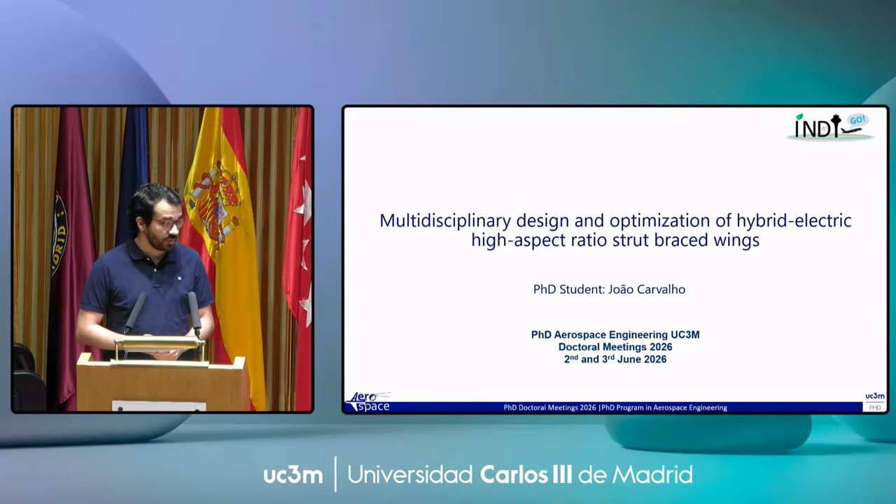Good morning, everyone. My name is João Carvalho, and the title of my presentation today is Multidisciplinary Design and Optimization of Hybrid Electric High Aspect Ratio Strut Braced Wings.

So the motivation of my work is supported by the aircraft climate impact, with the objectives of Europe to achieve carbon neutrality and also to reduce greenhouse emissions. So with these objectives, and taking into account that most civil aircraft still have a traditional configuration, meaning cantilever wing, there is the need to expand the design space if we want to meet increasingly stricter requirements, not only in terms of performance and efficiency, but also in terms of noise emissions and the overall air quality.

So this is an opportunity here, and in this project, Indigo, which I've been working on, and also in my thesis, we chose this non-conventional design, the strut braced wing, which consists of a cantilever wing with an extra wing, which we call strut, that basically supports the main one. From a structural point of view it allows to minimize the bending moment of the main wing near the root, so having wings with higher aspect ratios and therefore maximizing the aerodynamic efficiency. So this is the idea.

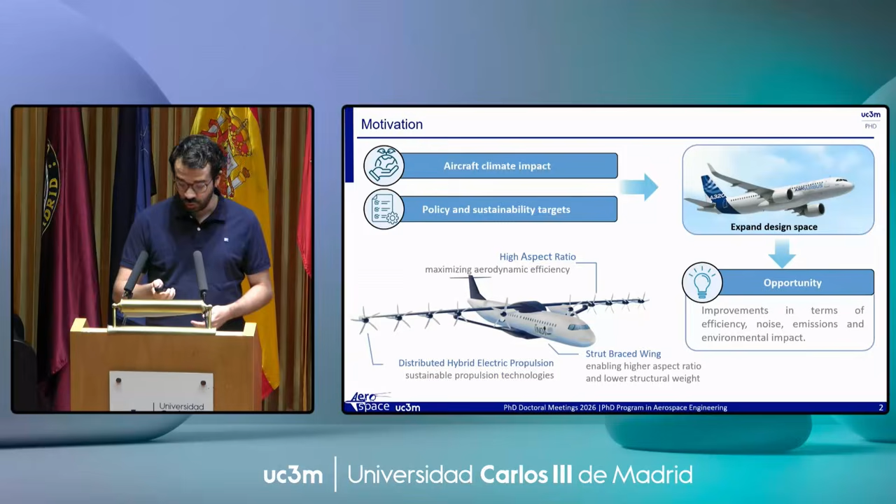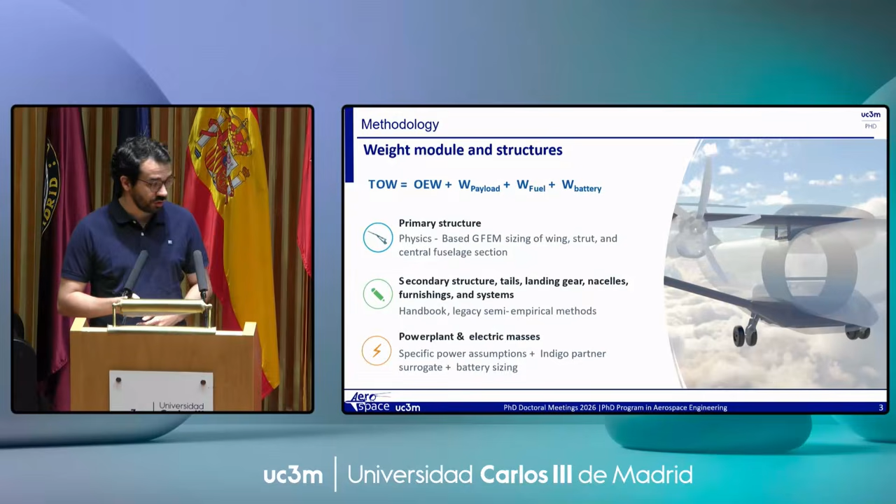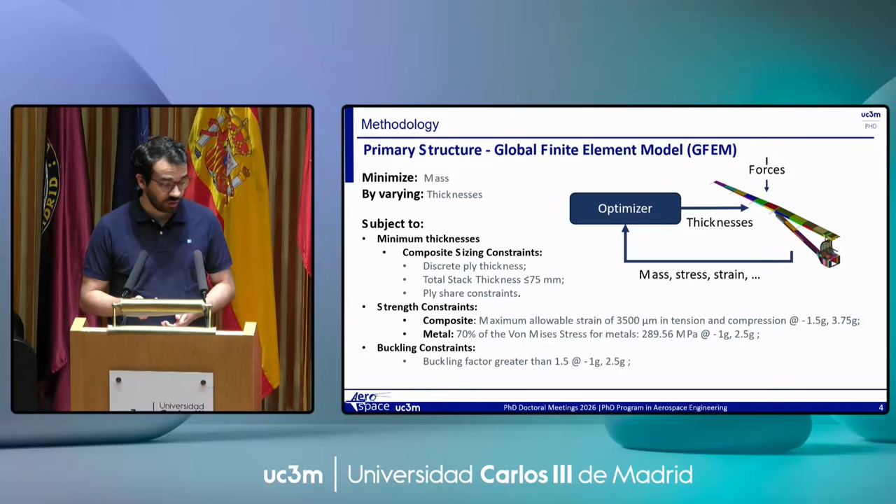So the physics-based model is basically a global finite element model, the GFEM, that is generated automatically within the OptiStruct framework, and it is a simple sizing optimization in which the wing and strut are divided in several panels, and then each panel thickness is optimized. We also considered composite materials with predefined stacking sequences, and the traditional load cases, which I will not explore in detail due to time constraints, and the traditional strength and buckling constraints.

The other most important module of this configuration is that it is hybrid electric. So we have a parallel serial configuration which we divide into two main parts, the inboard and outboard. In the inboard, we have the gas turbine connected directly to an electric machine that can function as a generator or a motor. If it's a generator, it extracts the mechanical power from the propeller to feed the electrical grid, and if it works as a motor, it goes the other way around, so it extracts the electrical power from the outboard part to feed the inboard propeller.

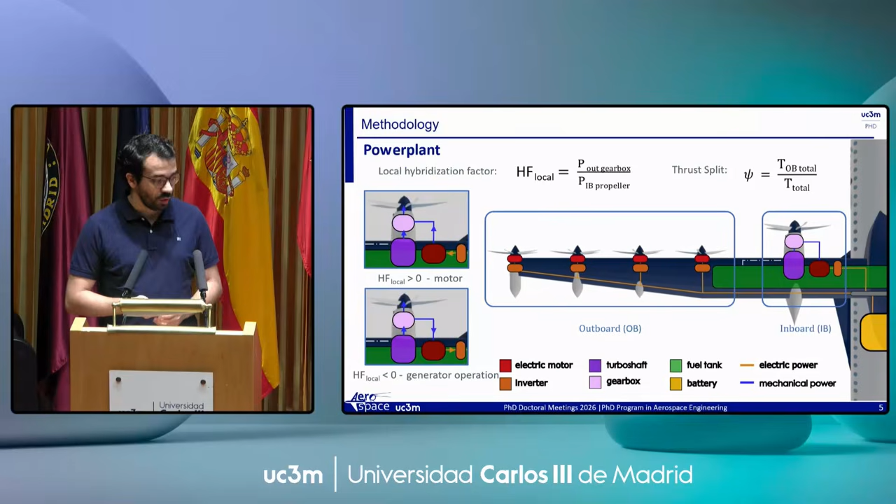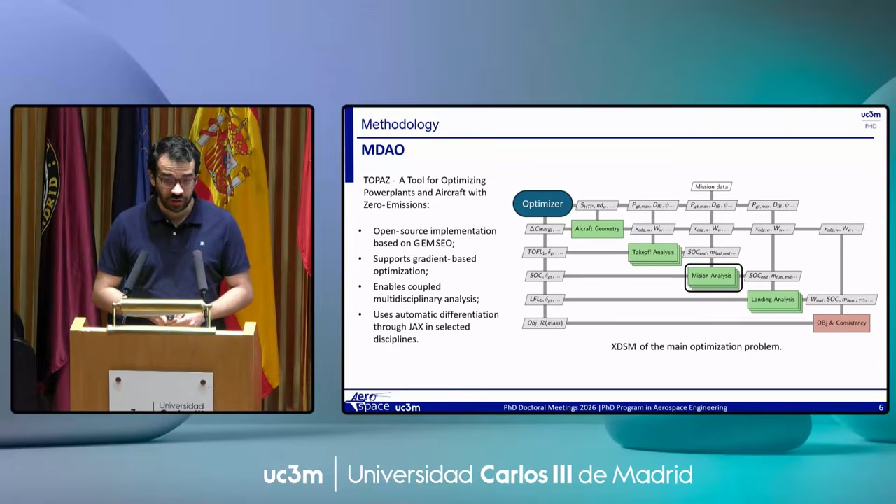So this is a simplified scheme of what we have. A first model with the aircraft geometry, where the weights are defined, the masses are positioned, and the center of gravity is also estimated. Then takeoff analysis and landing analysis, where these two segments are evaluated. And then a mission analysis where the steady flight phases are performed.

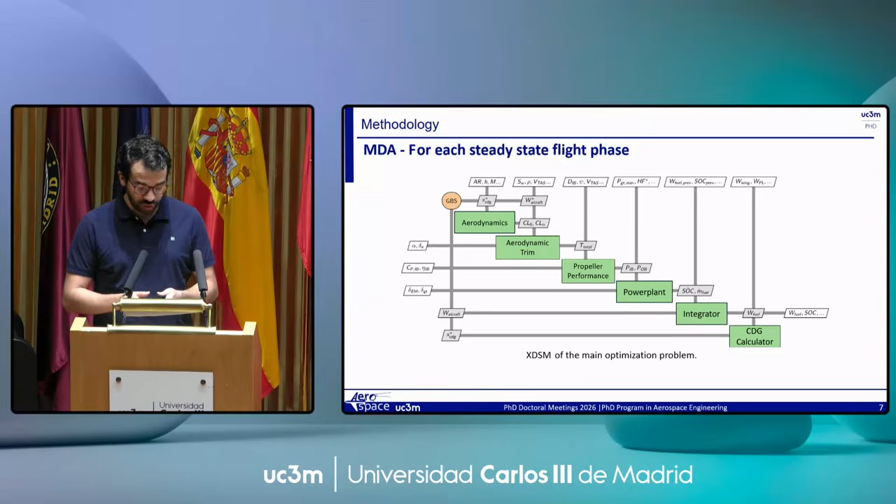And the most important output from the power plant, in our case, is the mass flow rate and the emission flow rate, but also the variation of the battery state of charge, which are integrated next so we can have the total weight of each pollutant and fuel.

Just a quick module presentation also. We have this noise evaluation feature that is a low fidelity tool coming from DLR. We have this EMMIS plus in-house program from DLR, which is basically a low fidelity tool in which they model each propeller as a point source with directivity, and we are using this tool to train a surrogate.

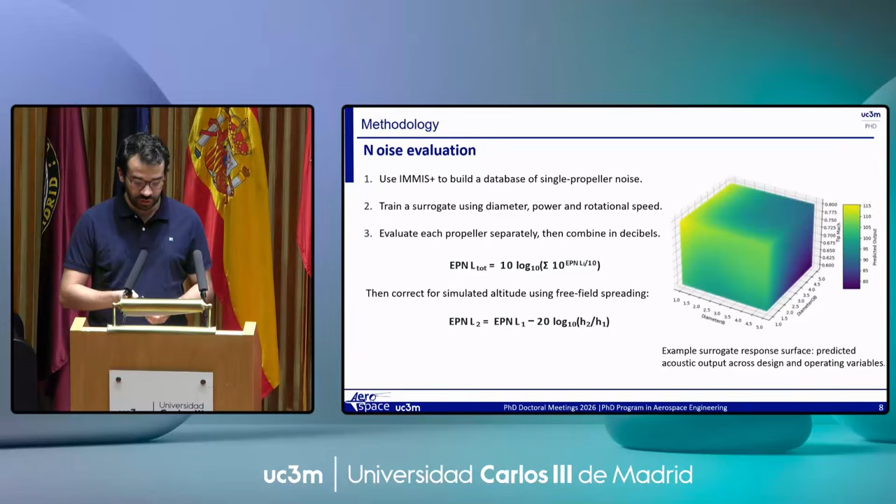So we train a surrogate for a propeller varying the diameter, the power, and the rotational speed, and then after we evaluate this surrogate for each propeller, we do the summation. So it allows us to have different variations in terms of number of propellers along the wing, and then we have this correction in terms of altitude because this surrogate was trained for a different altitude than the ones we are considering.

So this brings us to the case study presented here, in which we basically want to evaluate the trade-off between block fuel and noise. And like I mentioned earlier, the noise we are considering comes only from the propellers, so we are not considering fuselage, landing gear, so it's still a preliminary stage in that sense. And this is the mission we are considering, so a 1,000 nautical miles nominal mission with a 400 nautical miles diversion part, and these are the cruise conditions, so 8,000 meters altitude and Mach 0.6 cruise with a fixed MTOW and payload.

To do this study, the option was to optimize the block fuel, but doing the Pareto in a way that we can have a step in terms of noise constraint. So we have a noise constraint that gets strictly more demanding, and we were able to create that Pareto.

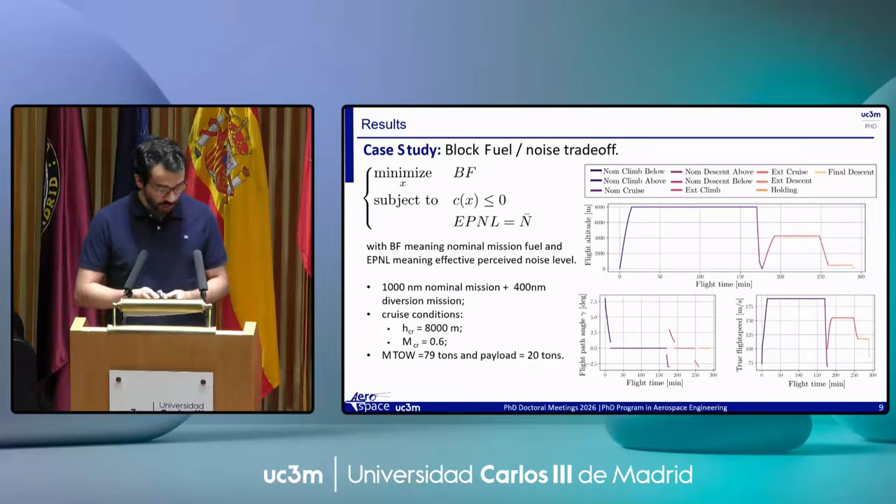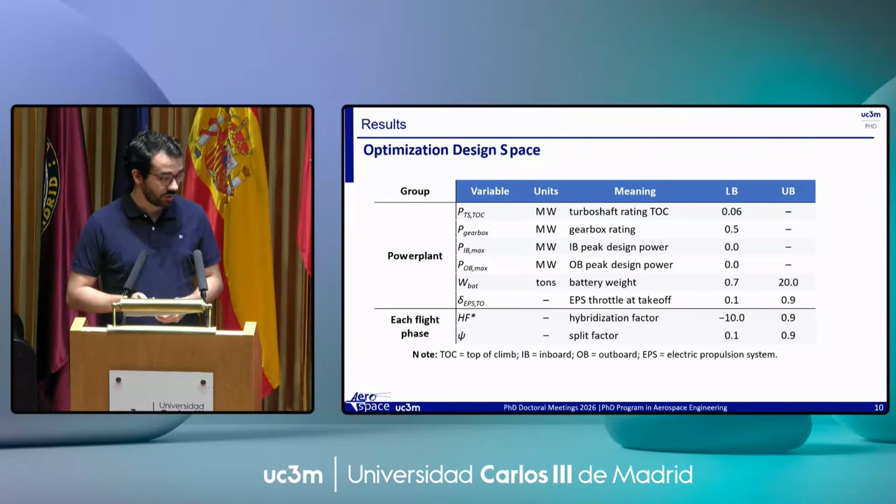This is basically the design space, in which in this case we kept the airframe fixed, but we are optimizing all the design variables within the power plant, and also the control design variables in terms of hybridization factor and thrust split factor. Also the propellers and some failure cases that I skipped due to time constraints. And the optimization constraints are the traditional ones in this type of aircraft design presentation, so I will also skip this part.

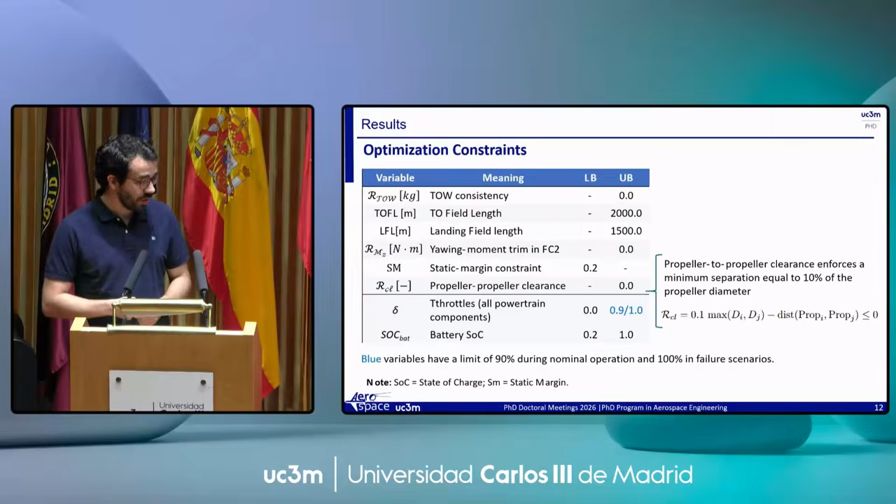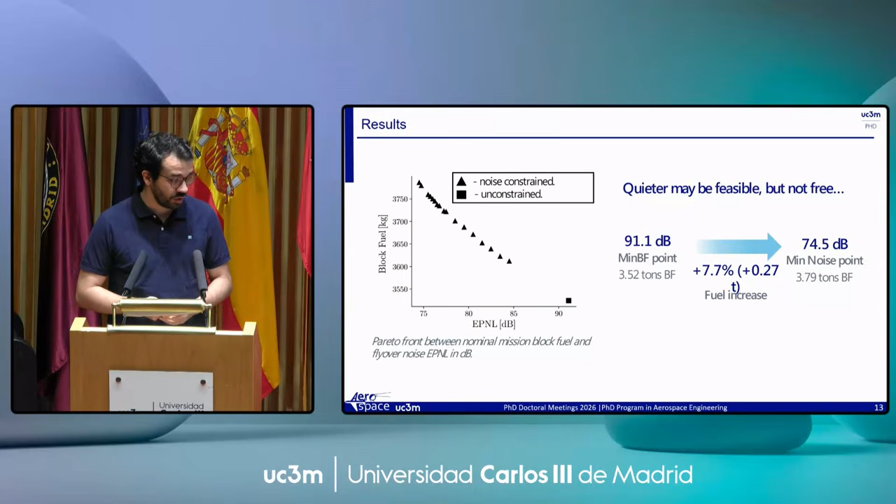And this is basically the Pareto front that we got. So from the unconstrained noise case to the maximum constrained one, we get a 7.7% increase of fuel. So the main conclusion is that a quieter aircraft is feasible, but it has a cost associated to it. So we tried to analyze the design variables behavior to see if these optimization results made sense physically.

João, you need to finish as soon as possible. Okay. 10 minutes already.

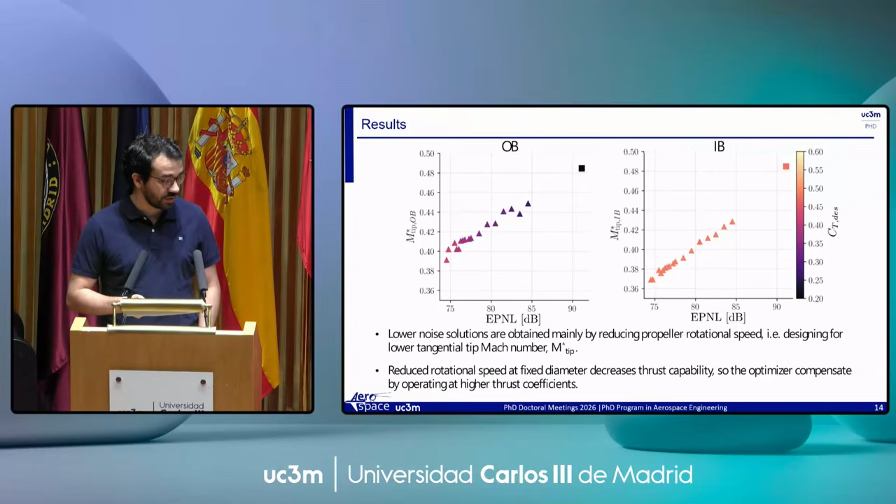So the idea very quickly is that the noise was decreasing by reducing the propeller rotational speed, which would lead to an increase of the thrust coefficients to compensate for the lack of thrust due to the reduction of that rotational speed. And then we can see here for different noise constraints that the propeller efficiency decreases with stricter noise constraints because the propeller operating point changes along the mission and gets further away from the peak efficiency zone.